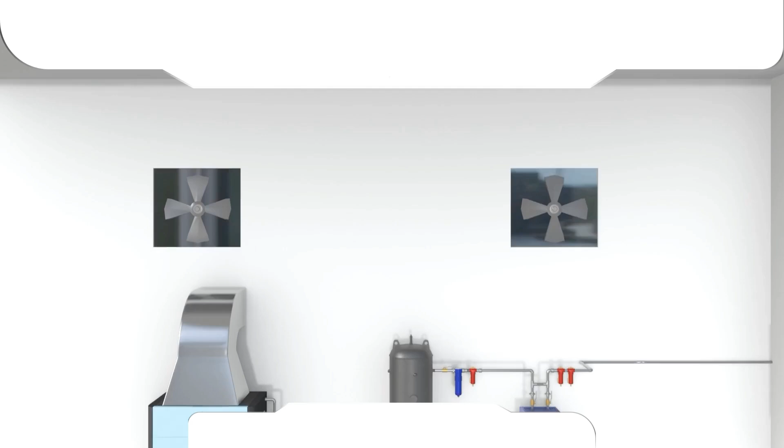Welcome to this training session on Colt Compressors. Through this session you will understand the installation of Colt Compressors at your site.

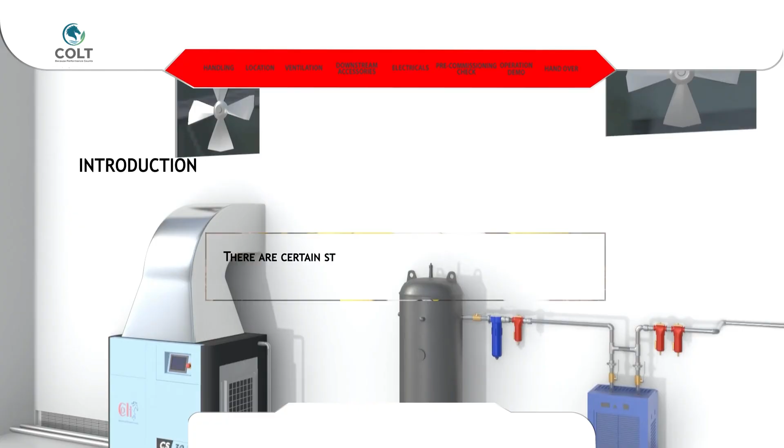There are certain steps which need to be taken for proper and successful installation of your Colt screw air compressor: handling, location, ventilation, downstream accessories, electricals, pre-commissioning check, operator demo, and handover.

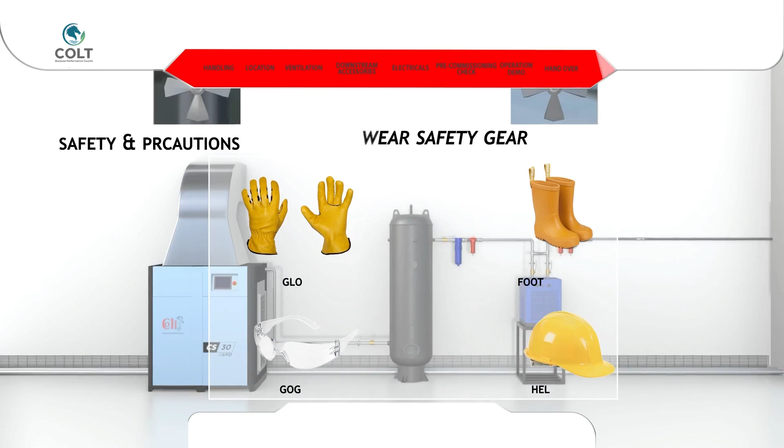Safety and precautions. Always wear safety gear.

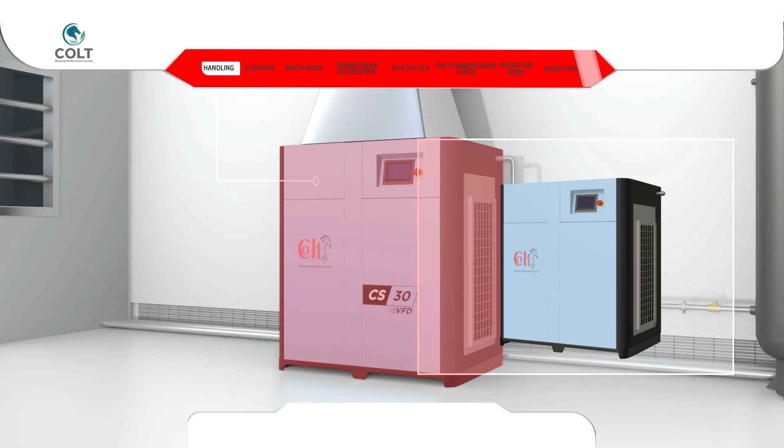It is very important that the compressor be handled carefully, moving it to its location and placing it gently. Lift the compressor using a pallet, forklift, or crane. Don't make any jerky movements or use hand levers to move the compressor.

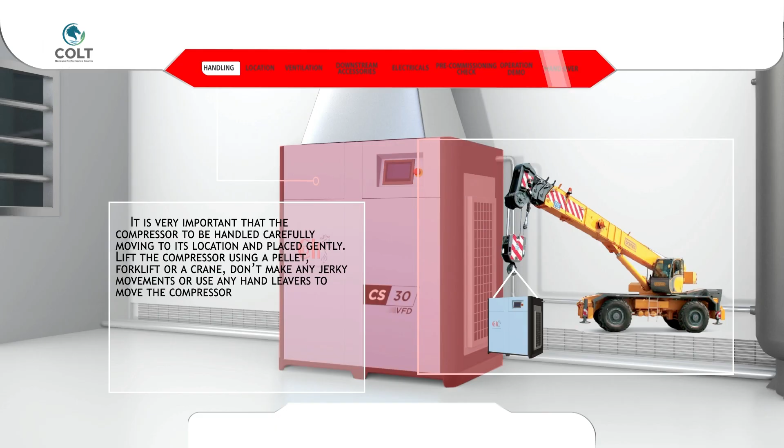The location of the compressor should be a clean and dust-free area. Make sure the whole base of the compressor makes contact with the floor, and ensure evenness of the compressor floor.

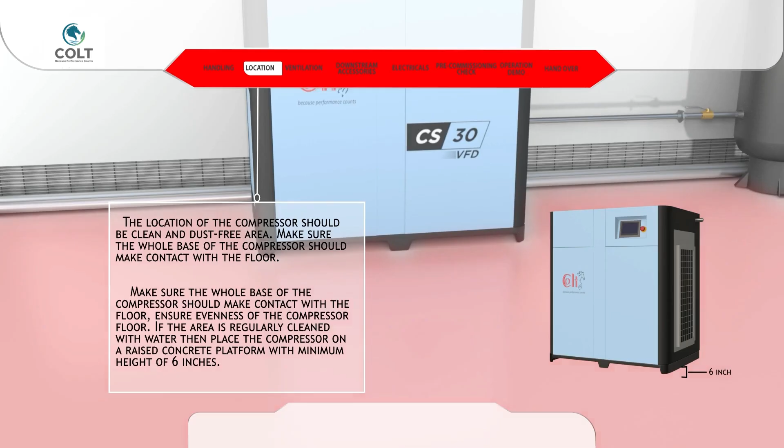If the area is regularly cleaned with water, place the compressor on a raised concrete platform with a minimum height of 6 inches. Ensure the compressor is protected from direct sunlight, hot air, flammable material, toxic agents, corrosive gases, and rain, as these can contaminate the oil inside the machine and affect the filters.

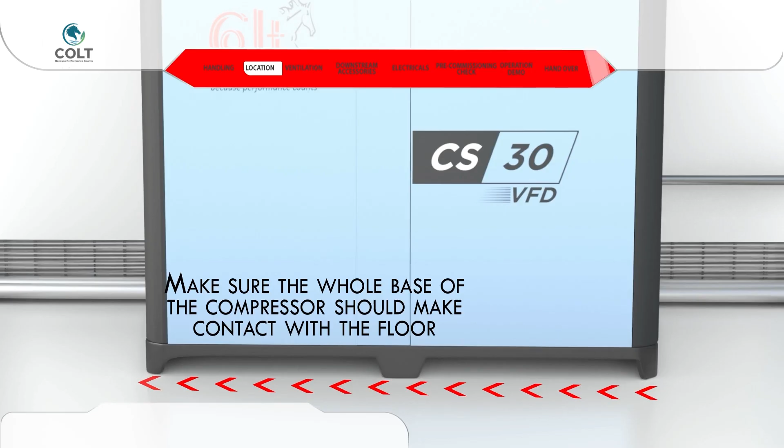Make sure the whole base of the compressor makes contact with the floor.

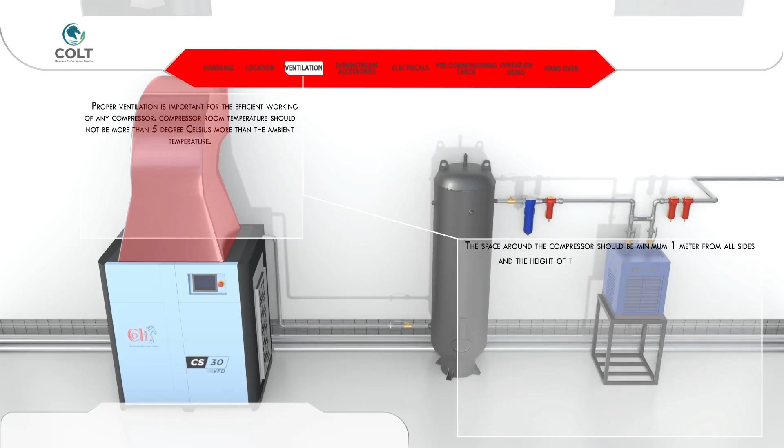Proper ventilation is important for the efficient working of any compressor. Compressor room temperature should not be more than 5 degrees Celsius above ambient temperature. The space around the compressor should be a minimum of 1 meter from all sides, and the height of the room should be a minimum of 4 to 5 meters.

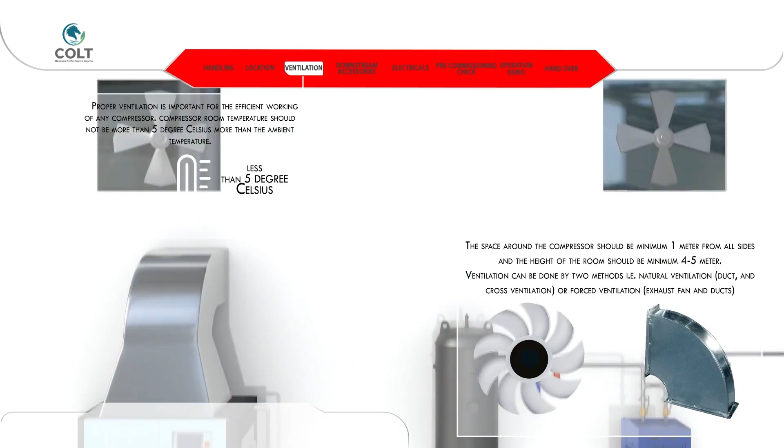Ventilation can be done by two methods: natural ventilation using ducts and cross ventilation, or forced ventilation using exhaust fans and ducts.

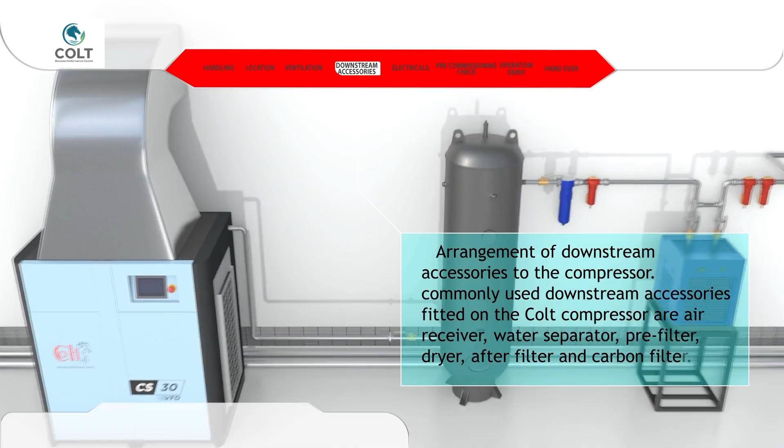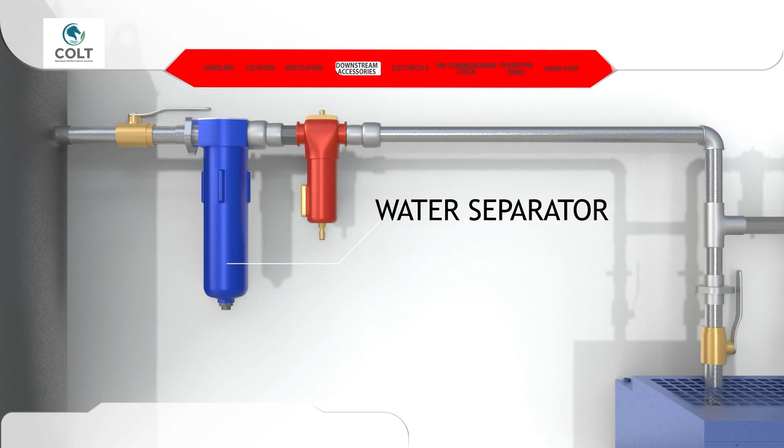Arrangement of downstream accessories to the compressor. Commonly used downstream accessories fitted on the Colt compressor include: air receiver, water separator, pre-filter, dryer, after filter, and carbon filter.

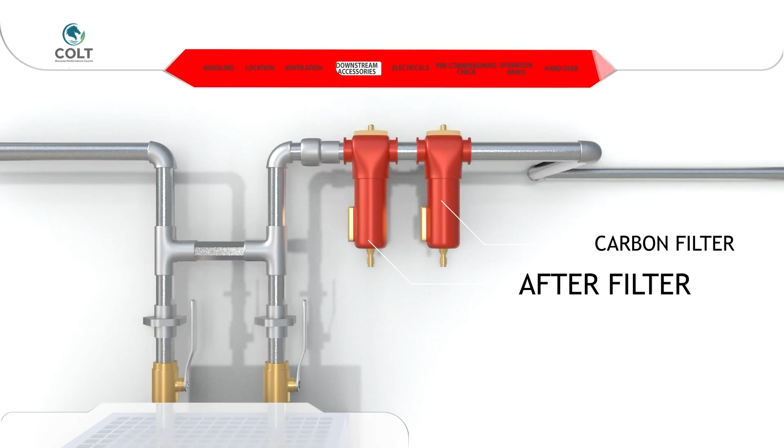It is very important to ensure that the air receiver is of the correct capacity, through the air receiver selection chart.

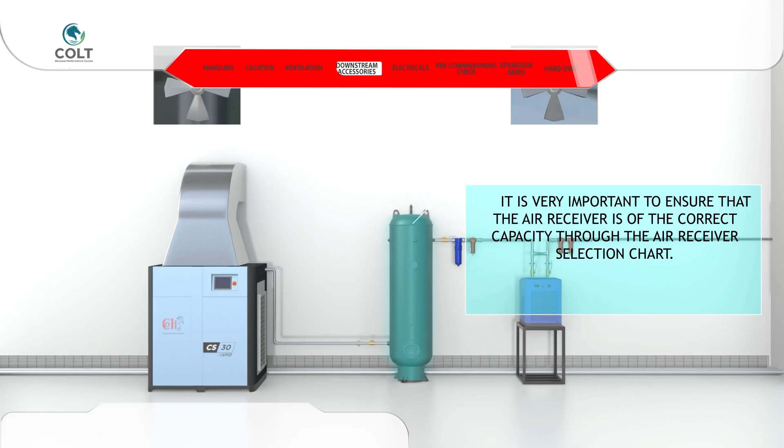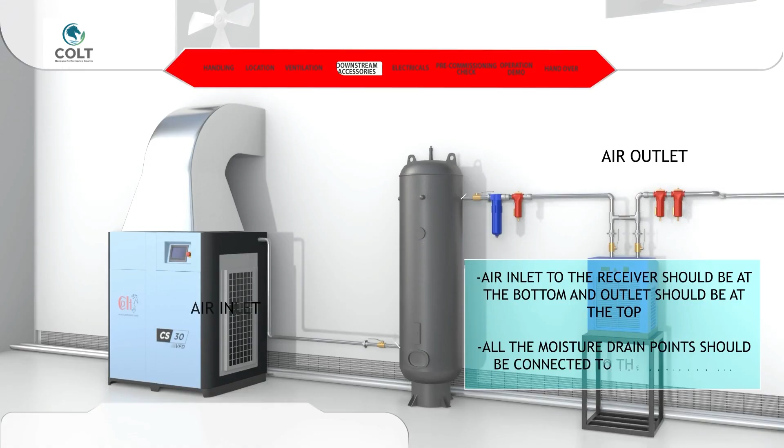Air inlet to the receiver should be at the bottom and outlet should be at the top. All the moisture drain points should be connected to the drainage pit. Piping arrangement and bypass arrangement should be made for the dryer and all the filters in case of any emergency.

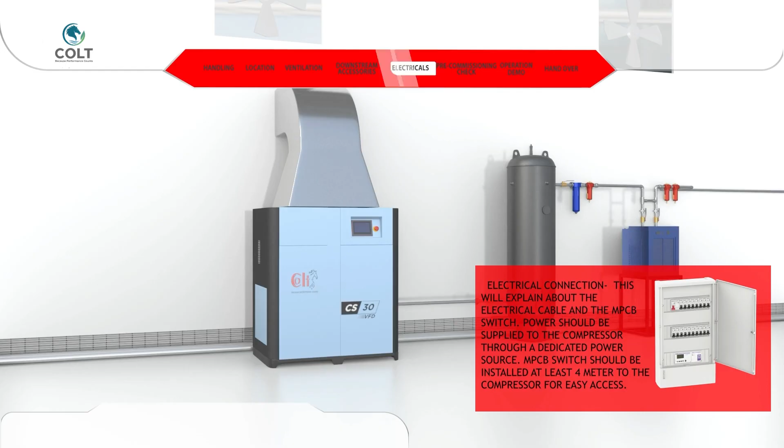Electrical connection: this will explain about the electrical cable and the MPCB switch. Power should be supplied to the compressor through a dedicated power source. The MPCB switch should be installed at least 4 meters from the compressor for easy access.

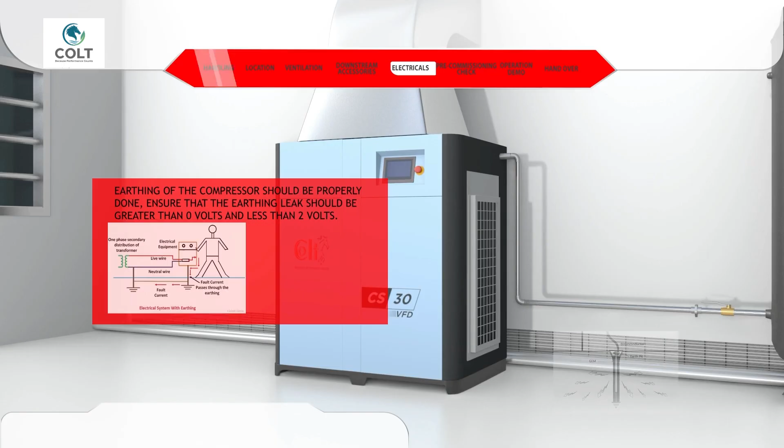Earthing of the compressor should be properly done. Ensure that the earthing leak is greater than 0 volts and less than 2 volts. Ensure earthing from the body of the compressor is connected to the earthing line in the earthing pit properly.

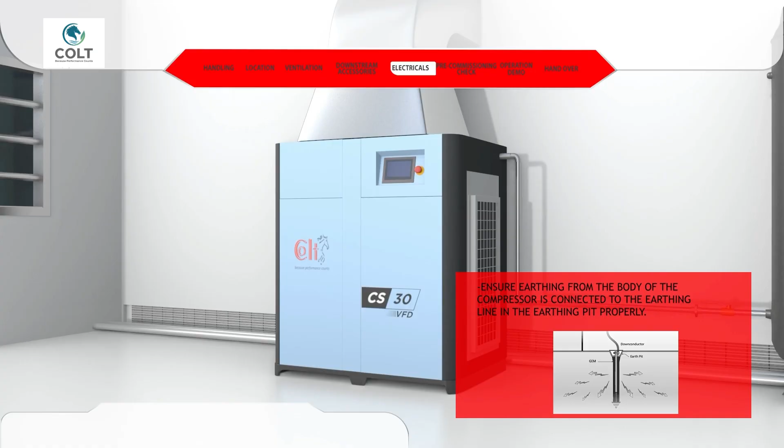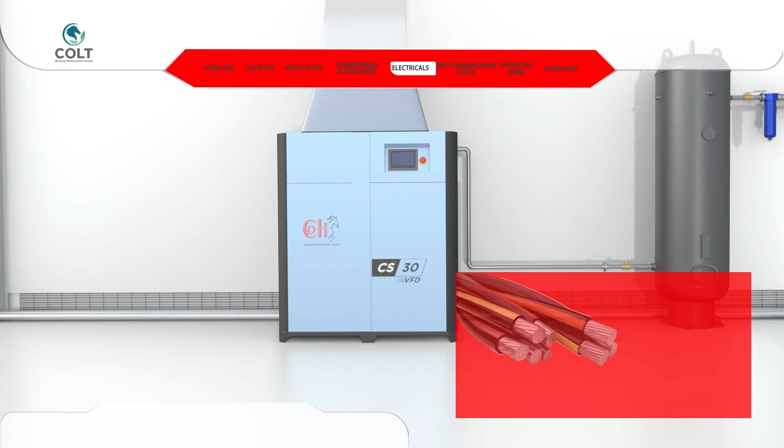Ensure the recommended size of the power cable specified by the company is used to avoid power failure. Cable connections should be done by installing lugs at the end.

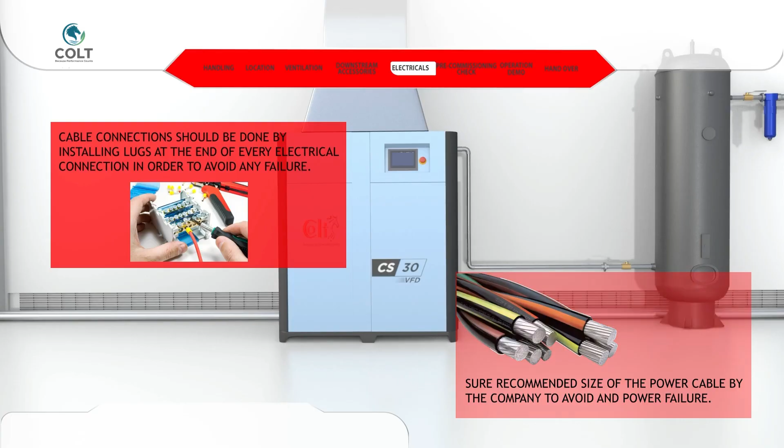Ensure water quality is within the given limits. For VFD machines, ensure the correct RPM is set in the Neuron controller. Check if the transport locking clamps are removed. Check if the hot air outlet/exhaust duct is provided as per guidelines.

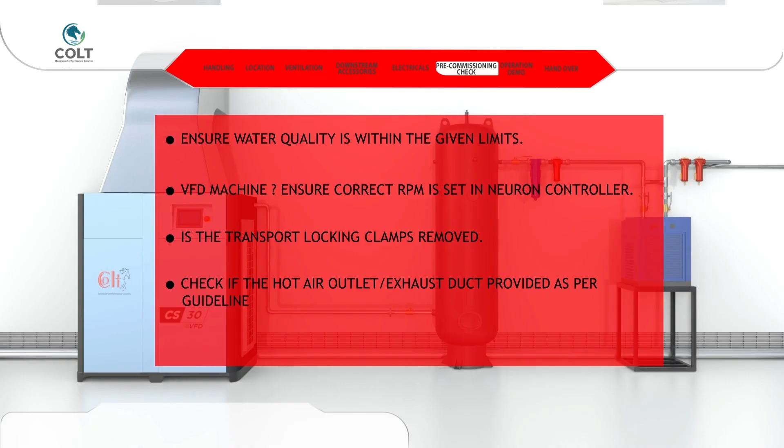Operation demonstration: checklist of topics to be covered for the operation demonstration to the customer.

Congratulations, you have successfully installed the Colt compressor.